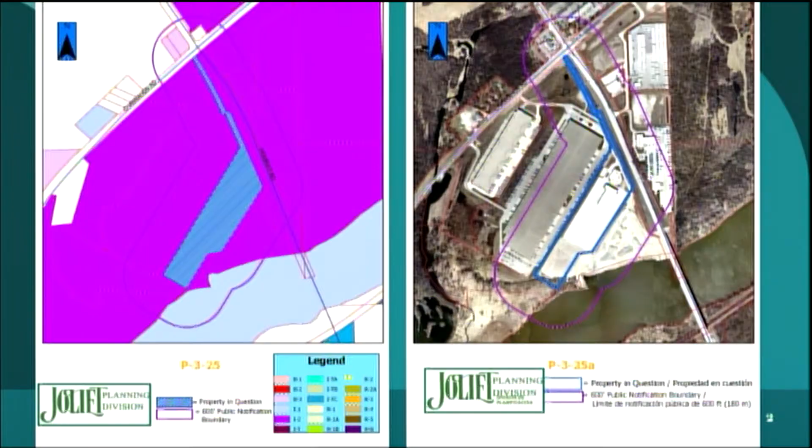For surrounding land use and zoning: to the north is industrial use zoned I-2 General Industrial. To the south, industrial use zoned I-2 General Industrial. To the east is Hobart Road, zoned I-2 General Industrial. And to the west is an industrial use and floodplain, zoned I-2 General Industrial.

Under site history, Ketone Business Center is an industrial subdivision located south of Channahon Road at Hobart Road that was initially approved in 2016. The entire subdivision has I-2 general industrial zoning and mainly contains logistics and transportation uses. The subject site is Lot 5 of Ketone Business Center Unit 3 subdivision, which was recorded in 2021. In the past few years, City Council has approved several special use permits for this address, including a special use permit to allow the sales of new and used trucks and associated equipment, a special use permit to allow a trucking facility with cargo container storage and stacking, and a special use permit to allow a truck terminal.

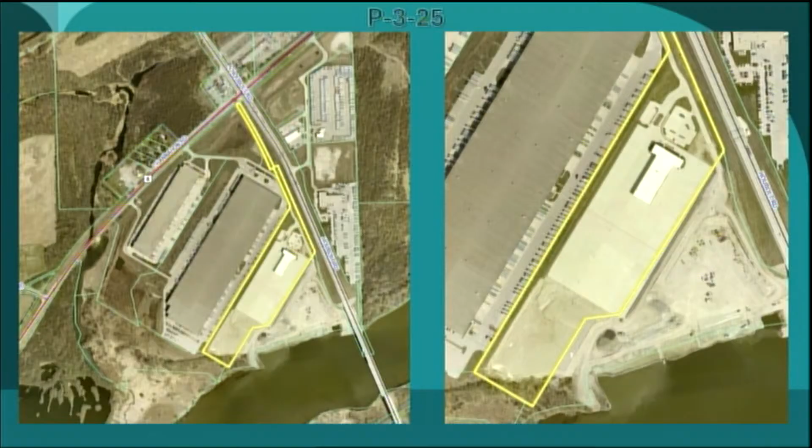The subject site has been developed with a 57,000 square foot building, an employee parking area to the east of the building, and a paved trailer parking area on most of the remainder of the site. The southwest portion of the site has not yet been paved, but is also planned as trailer parking spaces. The existing building is currently being built out for a truck equipment sales and rental facility.

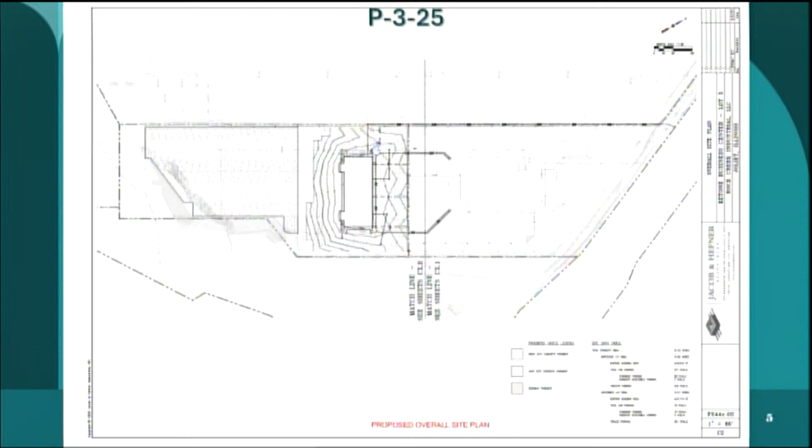Under special information, the preliminary plat of Ketone Business Center Unit 4 subdivision will create 2 lots from an existing 27.2 acre lot. Lot 12, which will be 13.9 acres, will contain the existing building and surrounding parking for a truck and equipment sales and rental business. Lot 13, which will be 13.3 acres, is proposed to be developed for a trucking facility per the previously approved special use permit. The re-subdivision will allow an additional building to be constructed on Lot 13 so that each use will be on its own lot.

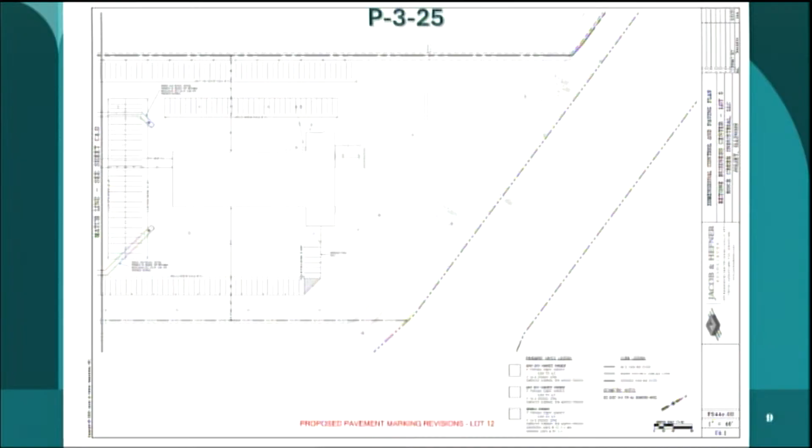The attached preliminary plat shows the proposed site plan for the entire subject site. Lot 12 will continue to have approximately 101 car parking stalls and will be restriped to have 230 tractor stalls. Lot 13 is proposed to have approximately 76 car stalls and 301 trailer stalls. The proposed site plan will not have more trailer parking stalls than the conceptual site plans included with the previous special use permit approvals.

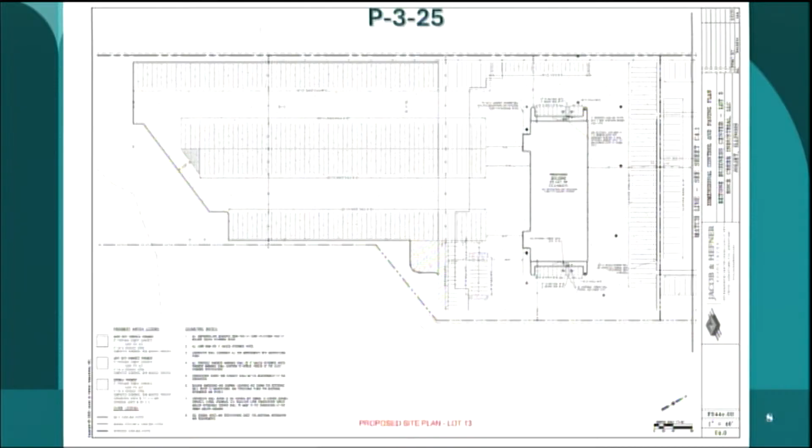The Ketone subdivision was designed to provide internal circulation to the lots to limit access points on Route 6. The subject site is currently accessed from the private road that runs along the east side of the lots to the north. Lot 12 will retain the existing access points off the private road, while access to proposed Lot 13 will be through Lot 12 via an access easement along the south side of the property. The petitioner is working with Public Utilities staff to determine the exact configuration of water and sewer lines to serve Lot 13.

The owner will need to provide utility easements as needed, as well as access easement for Lot 12. Public improvements and storm detention were previously provided for the Ketone subdivision.

In conclusion, approval of the preliminary plat of Ketone Business Center Unit 4 subdivision, which is a minor subdivision, will allow the subdivision of an existing industrial lot into 2 lots to allow a second user to construct a building on and occupy the site. And that concludes staff's report.

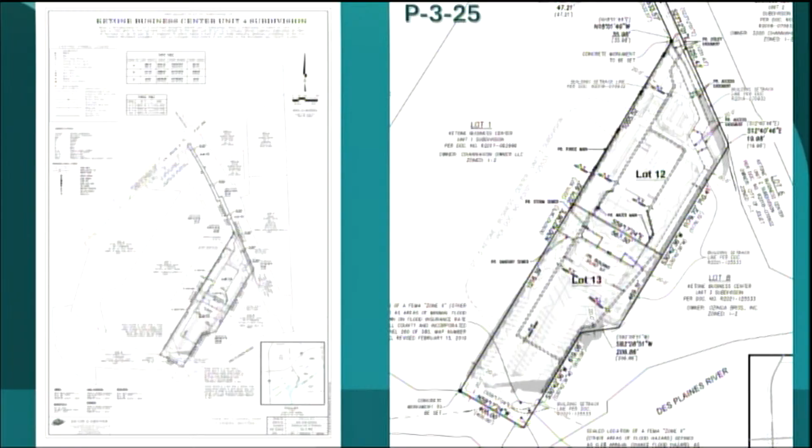May we have the petitioner?

Do you solemnly swear to tell the truth, the whole truth, and nothing but the truth? I do. State your name and address, please. Kyle Schumacher, 44 South Vale, Arlington Heights, Illinois, 60005.

Thank you. Anything to add? So a little history on this property. We purchased the 262 acres that comprises that business park in 2016. This particular property we started development on in 2022 with a 57,000 square foot industrial building and 621 trailer parking spaces.

We were able to lease the building and a portion of the lot in December to a company called Monroe Truck Equipment. They're owned by a Swiss company. They essentially maintain, lease and build snow removal equipment for O'Hare Airport, IDOT, and a lot of municipalities.

So we're left with the southwest side of this property, and we could currently use it as trailer parking spaces, but what we're realizing in the market is most people we'd like to lease to would like some kind of a building with those trailer parking spaces. So in order to accommodate a second building, code requires us to subdivide the property. Happy to answer any questions.

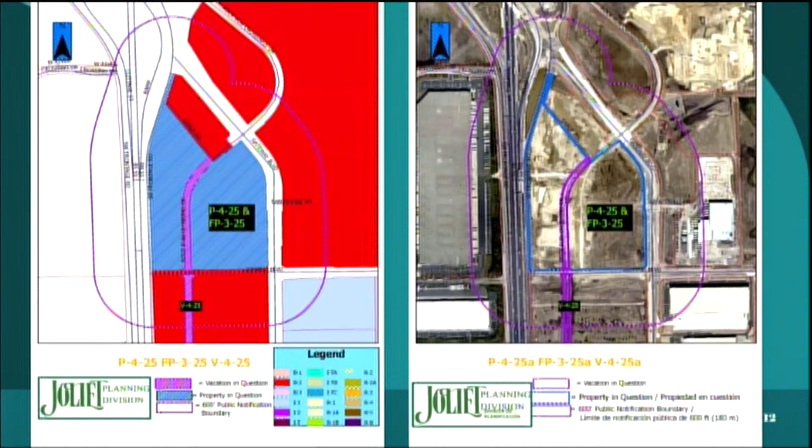Under site history, the subject property lies within the Rock Run Crossings redevelopment project area, which has been designated as a tax increment financing district since 2021. When it was created, it was the intention of the TIF district to include a future mixed-use development that would contain commercial, retail, restaurant, entertainment, recreational amenities, and multifamily residential housing over the entire 309-acre district. The subject property is a 37-acre portion of the Rock Run Crossings Lot 3 re-subdivision.

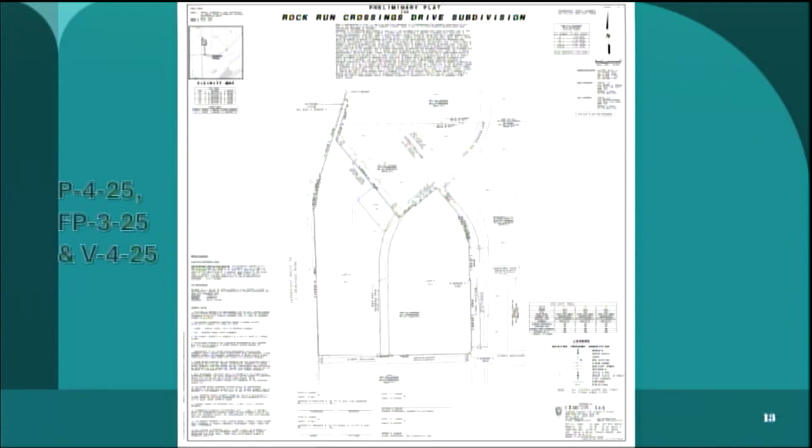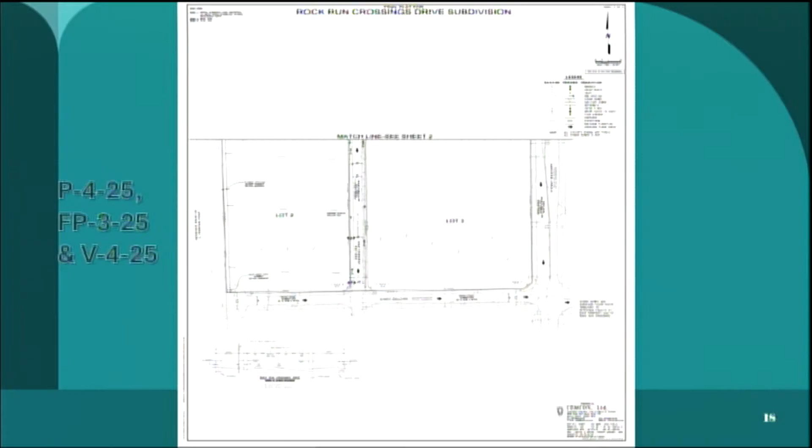The applicant is proposing a realignment of Rock Run Crossings Drive back to its original planned alignment from 2021. In May of 2024, the 3-acre portion of Rock Run Crossings Drive was vacated and shifted approximately 75 feet to the west. The petitioner wishes to vacate the newly dedicated Rock Run Crossings Drive right-of-way from 2024 and place the road back to its original alignment from 2021.

Figure 1 in your staff report packet shows the subject vacation, as well as on the screen, along with the existing and proposed right-of-way alignments.

For special information, the applicant seeks approval of the preliminary and final plats of Rock Run Crossings Drive subdivision, along with a vacation of the Rock Run Crossings Drive right-of-way that was dedicated in 2024. The applicant has also submitted a recording plat for approval, which will be put before the City Council at a future meeting. Lots 1, 2, and 3 in the proposed subdivision will have altered lot dimensions due to the proposed vacation and realignment of Rock Run Crossings Drive.

Table 1 below shows the changes in lot sizes that will occur because of the realignment of Rock Run Crossings Drive.

All 3 lots will have frontage on Rock Run Crossings Drive. It is expected that Lot 1 will obtain its primary means of access from an access drive that stems off Shale Road to the north. A 10-foot landscaping easement will be located along Shale Road and Rock Run Crossings Drive frontages of Lot 1. Lots 2 and 3 will likely be re-subdivided later as site development plans are finalized.

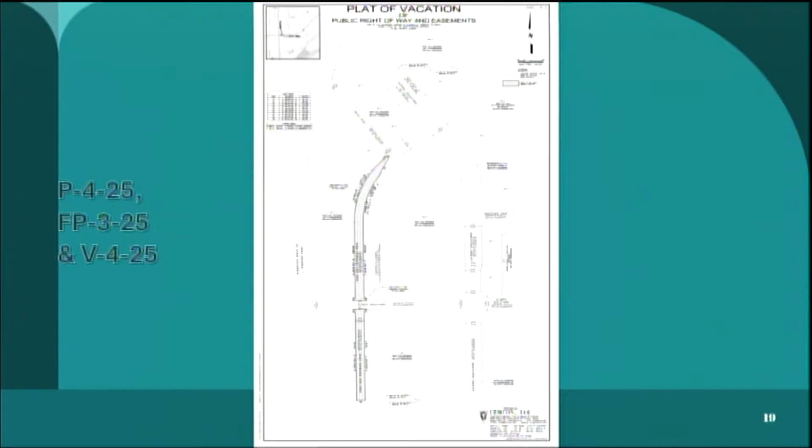There was a table in your staff report packet that summarized the size of the lots at their current acreage and their proposed acreage. In conclusion, approval of the preliminary and final plats of Rock Run Crossings Drive subdivision and the vacation of a 3-acre portion of Rock Run Crossings Drive will allow for future development of a 3-lot mixed-use subdivision. That concludes staff's report.

May we have the petitioner come up, please? Do you solemnly swear to tell the truth, the whole truth, and nothing but the truth? I do. State your name and address, please. Jim Teston, Cullinan Properties, Development Manager, 806 Junie Court, Joliet, Illinois, 60435.

Anything to add? Staff report covered it well here. The only thing I would add is there's no infrastructure in place, so it's really just a paperwork aspect of shifting the road. We need to get it platted and the old one vacated, so just working through the paperwork on the plats here. We hope to get construction going on the proposed alignment within the next few weeks.

Any questions from the commission? Hearing none, we should probably see if there's anyone here for public comment. No one here. Anyone here for public comment? Hearing none, a motion is in order for P4-25, FP3-25, and V-4-25.

Motion to approve all three? Second. Call the roll, please. Mr. Ulitz, Aye. Ms. Radakovich, Aye. Ms. Rohr, Aye. Mr. Turk, Aye. Mr. Cox, Aye. Mr. Crumpton, Aye. Chairman Kella, Aye. This will move forward to City Council with a recommendation of approval. Thank you.

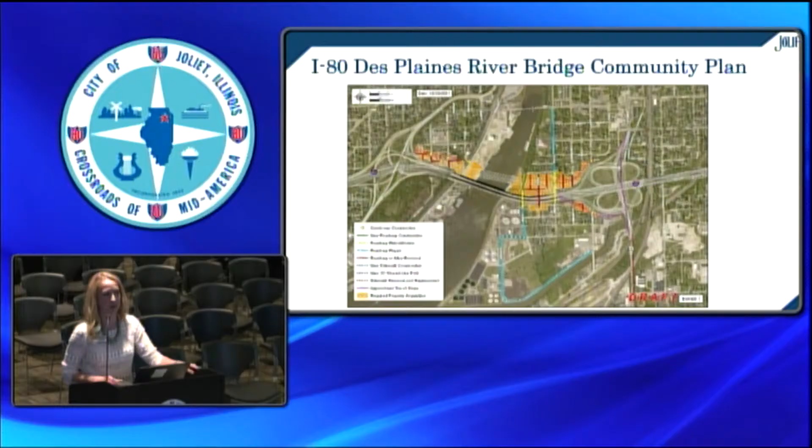The first project I wanted to update the Plan Commission about is the I-80 Des Plaines River Bridge Community Plan. Before you on the screen is an image, and I know it's dated 2021, but the plans for the reconstruction and realignment of I-80 have not changed. This project has been well underway for quite some time with engineering plans being finalized. That shows you the existing configuration of Interstate 80 and then the location of the new bridge.

What's shown in orange on your screen is the property that the state of Illinois is acquiring in order to make the new bridge construction possible, as well as the takedown of the existing bridge. We've gotten that question a lot. They will be physically deconstructing the existing bridge, and that is also freeing up land after that's done.

Because of the impacts to the neighborhood on the east side and the west side due to the construction of the new bridge and the takedown of the old, the state of Illinois has committed $400,000 to doing a really targeted community plan. One of the main points of that plan is to also decide what the stakeholders and residents in that area want to do with $3.5 million that the state of Illinois has committed in recognition that the people in that neighborhood are being impacted.

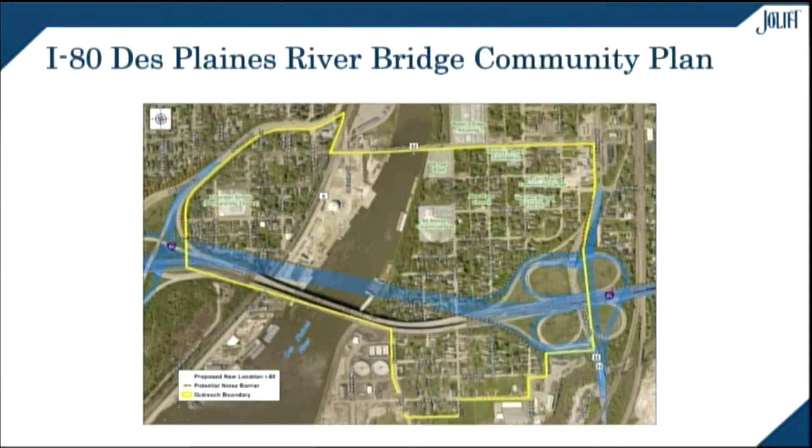The $3.5 million is to go towards things like community improvements and aesthetic enhancements in the neighborhood. This community plan is to generate ideas about and come up with a firm final decision on what that money will be spent for. It's also to get feedback on what the land that is going to be freed up by the takedown of the bridge and the property that was acquired to construct the new bridge. What does the community want to see with that property?

This is just a summary.

Our project consultant is CDM Smith. The City Planning Division is working with about four different consultants right now. We have CDM Smith with this project, we just finished Houseal Lavigne with our ETOD plan, we're working with Lamar Johnson on our comprehensive plan, and another firm I'm not personally working with on the Choice Neighborhoods Initiative transformation plan.

This project started earlier this year and is slated to end around December of 2026, following the same timeline as the comprehensive plan, but this is a very, very small targeted area.

Other project outcomes include money set aside to do what we call in the planning world tactical urbanism type projects, meaning we're going to try a pilot project in this area. For example, a pilot project would be the temporary striping of Water Street to see what it would feel like if it was officially striped as a 2-lane road. Right now there is no striping, and we'd do other kinds of temporary improvements to get a feel of what the community would like.

Where are we at in the process? We are at community meeting number one, which is why I wanted to come today. That meeting is happening next Tuesday.